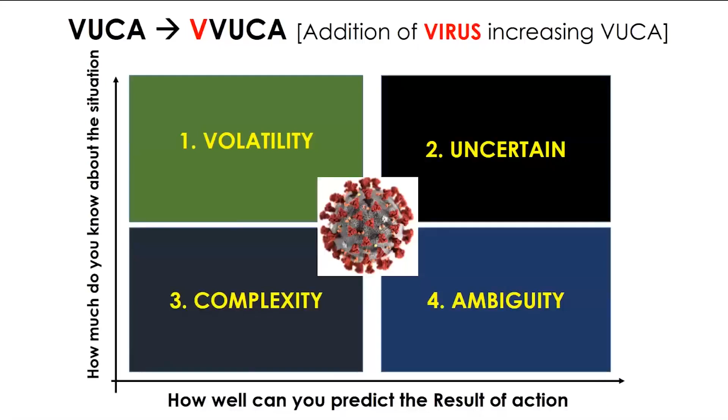Now, what has happened in this VUCA world is that the V has become a double, and the addition of the virus, the COVID-19 crisis, has made the world even more uncertain and ambiguous, which was already very complex, and that's something very unpredictable in today's situation.

There are many challenges we are all going to face in the current crisis. There is going to be an impact on India's economic growth — a story which was supposed to take off and grow to 5 trillion by 2025, but that has got impacted, whether in the short term or medium term is something we'll have to see. Definitely the GDP growth rate is going to come down.

The other thing we are going to see is that this is going to impact various sectors. Automotive, power, IT, FMCG, healthcare, telecom — all of this is likely to get impacted. And automotive, where we are talking about, is expected to have a significant impact in the current context.

So if you see the industry, which had already degrown 18% in financial year 2020, what it's likely to be in financial year 2021 is something very, very uncertain and unpredictable.

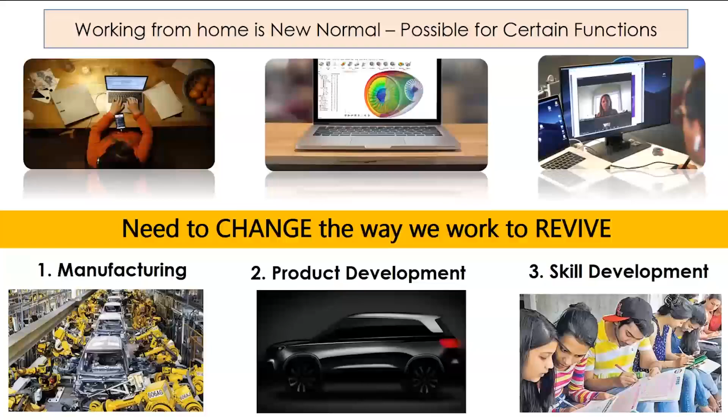These are something which we need to see how we are going to take this forward in such a disrupted environment. And the virtual world - how do we use the virtual world? How do we look at some of these things, and how can we use technology to change the way in which we are looking at manufacturing, product development, and skill development - is what I would like to talk about from now on.

So first, of course, manufacturing, a key point. Auto manufacturing contributes more than 50% of the manufacturing GDP of India. And as we have seen, there have been various changes in manufacturing. In the 20th century, it was all about using a lot of robotics and automation and digitization, and using a lot of electronic and digital networks.

Today we are talking more about IoT and how we can use autonomous machines or big data analytics, or use Internet of Things in our manufacturing to make it smart manufacturing, and use machine learning or AI for doing our work. But this requires a lot of work in terms of what we are already doing on the manufacturing lines, and how we analyze the data, how we get the data, and how we use that and use technology in order to assess it and do automation and machine learning, so that we are able to predict and do certain things.

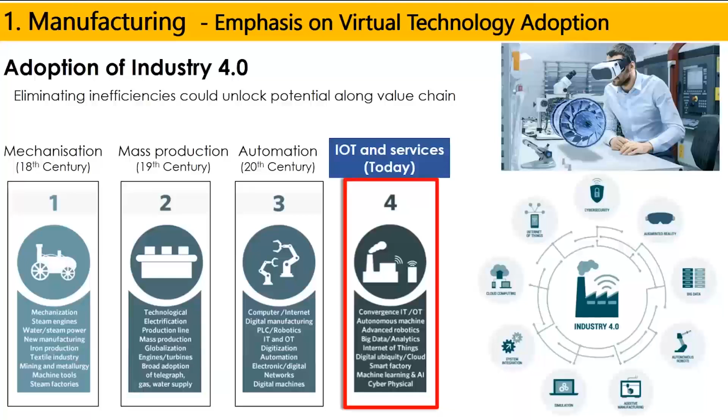When we look at manufacturing, I think that's something which is already evolving, and which I think is going to further evolve with social distancing norms becoming a new reality going forward. And of course, whether this is medium term or short term or long term is something which nobody can predict till we get a vaccine or something like that. But this is something which we need to look at.

In today's context, when we have started manufacturing in Maruti Suzuki, social distancing has been one of the key changes which has impacted the productivity and some of these things going forward. How do we recover and go back to that? We need to look at using technology and putting in more automation, and some of those things is one way forward as far as manufacturing is concerned. But that's one whole new big topic.

But today I would like to focus more on product development as engineering. I think one of the key things is that when we look at model development, we look at design, and we look at engineering and evaluation. So the first part is the design, and when we are looking from a customer point of view, what does a customer need as far as the product is concerned?

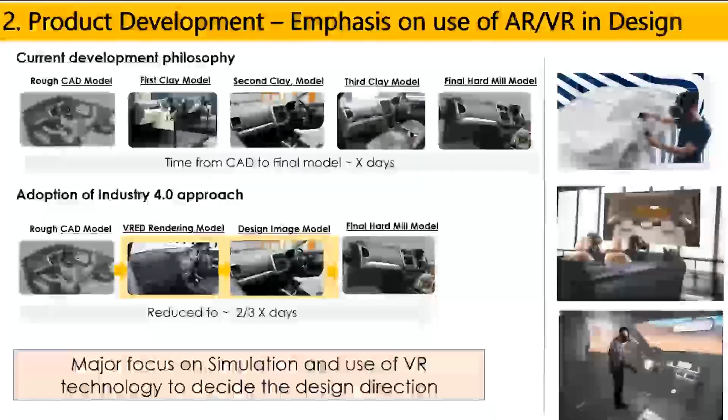The designer looks at the concept and starts sketching, and from the sketch he makes a 2D sketch and then makes it into a CAD model. The current development philosophy, as you see on the slide, uses various stages, so we use a combination of CAD modeling and physical modeling in order to come to a conclusion and a final model which can be approved by the management. And it goes through an iterative process.

Is this iterative process very good in terms of efficiency? Definitely not, it takes time. So what do we do as far as improving the efficiency is concerned? The designers and engineers work towards how do we adopt a 4.0 approach towards this, and how do we reduce the development time?

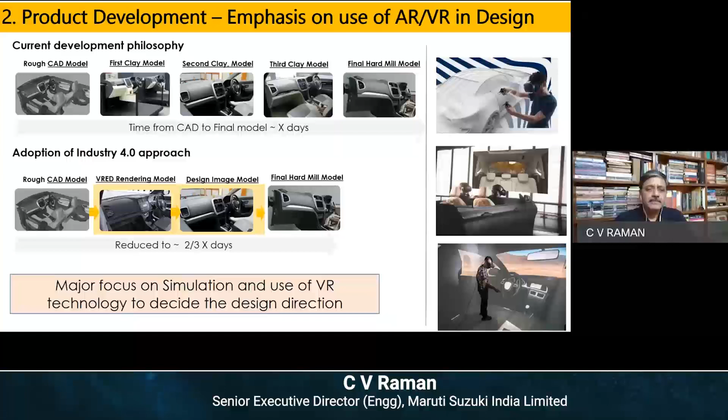The major focus is on use of virtual reality and augmented reality. If you see, there are stages which can be removed by using a lot of virtual reality or augmented reality, and only make one model, which is the final model. So we have to make only one final model when we are doing this.

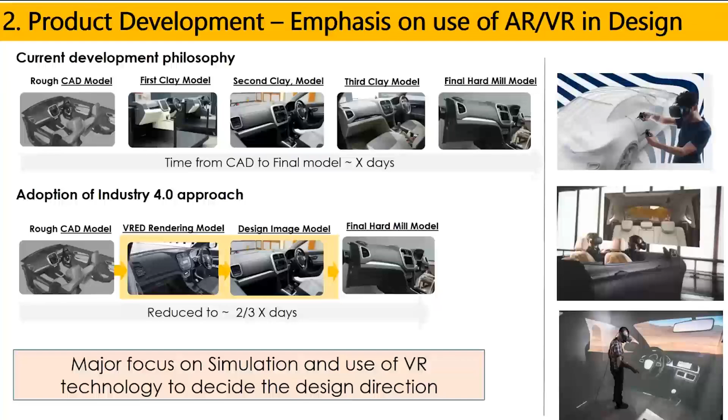I think the key point is how do we improve our judgment capability when we are looking at AR and VR? It's very, very difficult for management and for marketing and other people to be able to appreciate how designers will be able to view these rendered models in such a virtual reality atmosphere. It requires a lot of skill and capability to take the right decisions in terms of whether the design is okay or not, what kind of gaps are acceptable or not acceptable, and the perceived quality of the model is something which is always questionable if the judgment is not okay.

I think the key point is: the people who are going to judge and approve the model - how will they develop the capability of using virtual reality tools to take judgments that will finally be accepted by the customer? That's a gap that exists, meaning a lot of skill and capability upgradation has to be done by the design team and management team. These tools are available today, and people can start using them.

Everybody worldwide is using it. Many OEMs also don't do a final mill model. They just go directly to data and then start the engineering process. So I think that's something we need to look at.

And after all, it's all collaborative engineering, and even at these stages, the engineers are also looking at the data and seeing what is manufacturable, and whether it's okay engineering-wise or not.

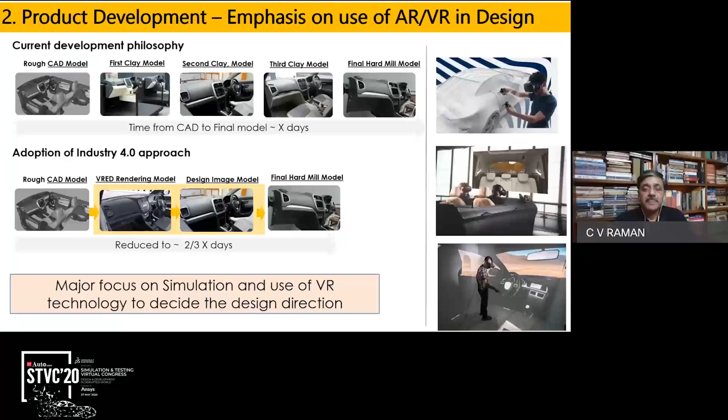The second part, we'll move to the engineering aspect of it. Why do I say this? If we are going to make changes after prototyping, or in the first build, and we find out there are problems - what you typically see is that you have to do a lot of engineering changes, and that means it becomes an iterative process, and you end up taking much longer, which is a very conventional approach.

So our thinking is always: how do we front-load some of these activities and push them forward into the concept stage and 3D modeling stage, and get all the engineering inputs in to make sure everything is okay. I think that is something we need to do.

As I explained in the earlier slide, the design process is not robust enough. There could be a lot of engineering changes later on, and therefore that robustness is something we need to address.

A similar thing applies to engineering, because after the CAD data is released by the designers, the engineering teams have to convert it into 3D data and into actual drawings, and do the computer-aided engineering analysis and look at various use cases, which we'll talk about in the next couple of slides. So that's something very important to see.

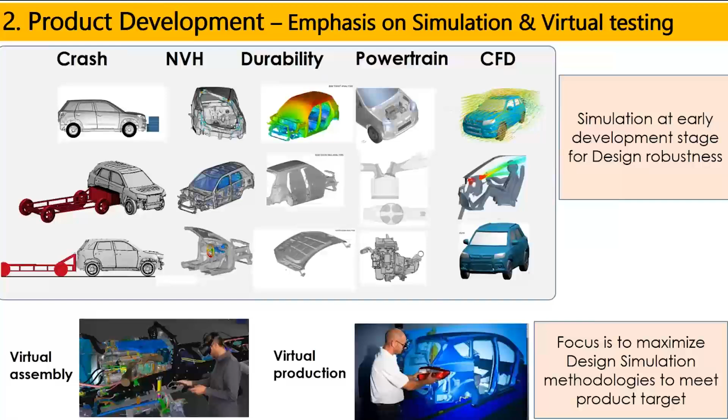This comes down to how well engineers are able to judge what kind of DFMEAs or PFMEAs they can do, so they can make this whole thing very robust. If they are able to improve the models, there is a high probability of 90-95% correlation, meaning very few engineering changes when we actually go into the build stage. So this is one aspect of virtual simulation.

But one key point is that in product development today, validation is still very important, and that is actual physical validation. The physical validation of models is very important, because virtual validation is maybe about 85-90% correlating to physical testing. But physical testing does throw out certain issues during the actual build and testing, defects which come out, so we need to take countermeasures and engineering changes so that when the SOP happens, the customer gets a trouble-free product.

So I think that's something we all would like to strive for. And as I explained, we are of course going to do the crash, offset, side impact, pedestrian testing and so on. But the key point is how do we get all of these data points from our testing, and the variables of road surfaces or the way the customer is using the vehicle, and build it back into the CAE model?

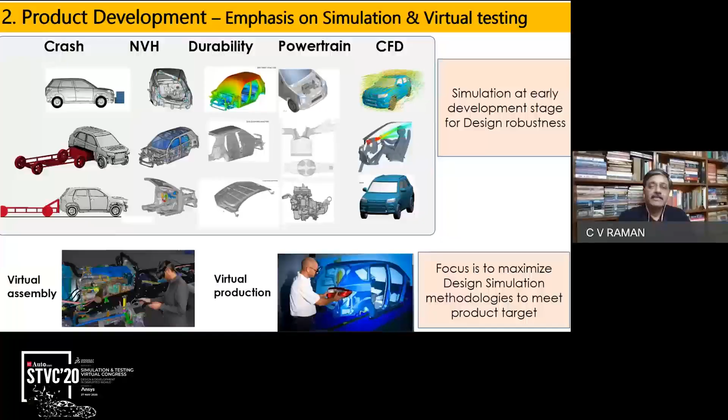If we are able to build this back into the CAE model, then I think the correlation starts improving. And if we are able to achieve 95-100% of this, which is very difficult because there are so many other variables, that is something we need to strive for today, so that we can reduce the product development process.

There is also this thought that there should be virtual labs, so the labs should be able to do virtual testing. Instead of doing road tests or endurance testing physically on various things, can we move to a different way of creating virtual labs so that we can reduce prototyping and physical testing?

This is something we'll have to work on further, as the testing teams, the engineering teams, the validation teams, and the CAE teams will have to work together to see how we can create futuristic virtual labs that can actually reduce this. So this is something we need to strive for, and this is an opportunity available to us today.

Because what has shown in the last 2 months in the lockdown is that we were not able to do any prototyping or physical testing in those 2 months. But yes, the engineering work was happening.

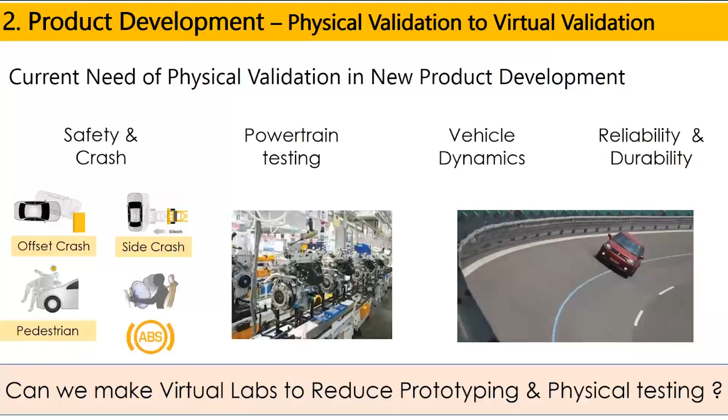We were able to do a lot of work through VPN access, shifting workstations to the engineers' homes, and doing all of that. The CAE team was also able to do this. But a lot of collaborative work with suppliers got impacted, and physical testing at suppliers, or at our end as the OEM, also got impacted.

I think that's something, even though this is likely to be a futuristic new normal, this is something we need to account for - how do we do physical testing, and how do we catch up now and with product plans going forward, something all engineers are working on. Virtual labs could be one possibility going forward, which could improve the robustness of CAE and simulation, so that in such uncertain times or crisis, we can still do our product development on time.

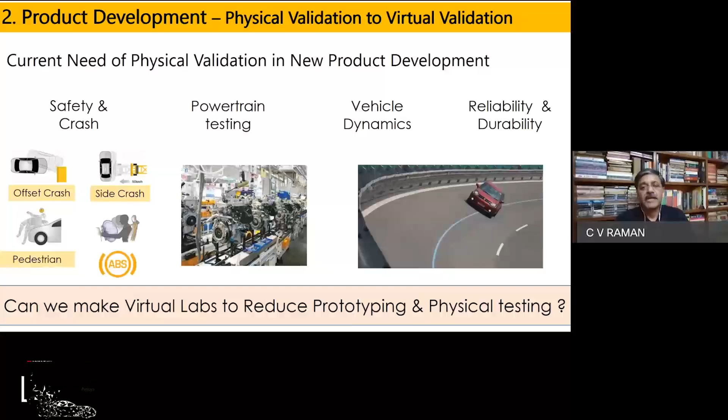The third fact is how do we develop skill in the organization? This is something we all need to work on. I think engineers, when they come to college, they do classroom lectures. Today it's moved to e-learning, and they are going through some experiential testing or other labs in their college curriculum.

But when they come to the industry, they actually have experiential learning when they work in the R&D centers, in the testing centers, while they work in the industry. But I think there's a likely change happening where this experiential learning is going to shift to knowledge-based management and knowledge-based learning, where there's a lot of information and data on what has happened in the past, various use cases, and what countermeasures were taken, so that engineers are able to learn much faster.

I'm not very sure how this actual experiential working with the hands is going to get switched over when we move to virtual labs or using only AR and VR technologies, because unless we are actually doing work with our hands, we're not able to judge it better. But if this is likely a new normal, this is something we need to look at in future - we need to develop a skill and capability in organizations for how we can move from experiential learning with our own hands to more virtual labs using AR and VR technologies.